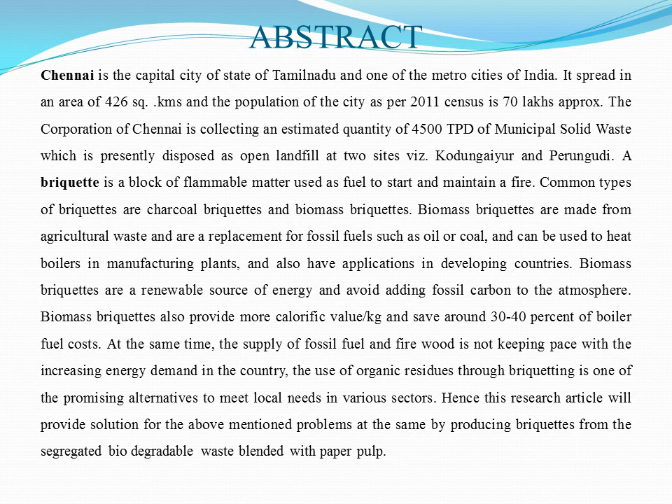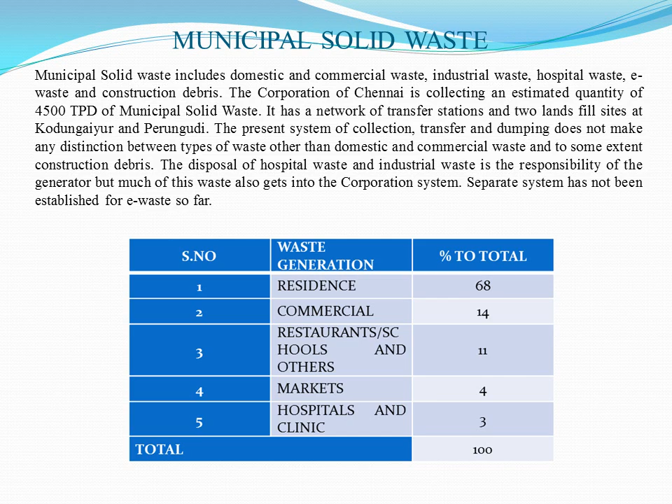Today municipal solid waste generated in our city comes from residents 68%, commercial 14%, restaurants 11%, markets 4%, hospitals and clinics 3%. Keeping this in mind, this large amount of waste generated in Chennai city was depleting our land. Landfill is a major problem today in our society, as there is no place.

As our Mayor said, we have to extend the Kodungaiyur and Perungudi area sites to fill the dump sites. So this was one of the major problems. So everyone is jumping to alternative sources for many fuels.

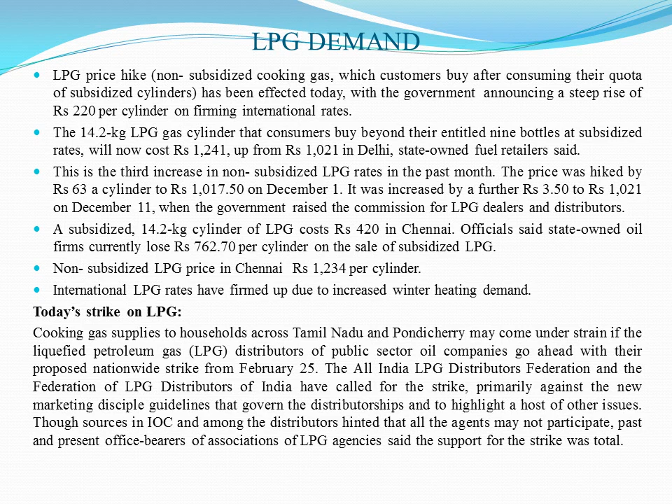So we found that we have to replace an alternative fuel for cooking gas, that is LPG. Today LPG is one of the major demands in our state due to its cost and other reasons. Keeping this in mind, we are replacing an alternative fuel for LPG.

Now the project is briquette. Briquette is not a new concept, it already exists. What is briquette? The briquette is a block of flammable matter. Just imagine it like cow dung that is used as fuel to maintain a fire to cook some food. That's it.

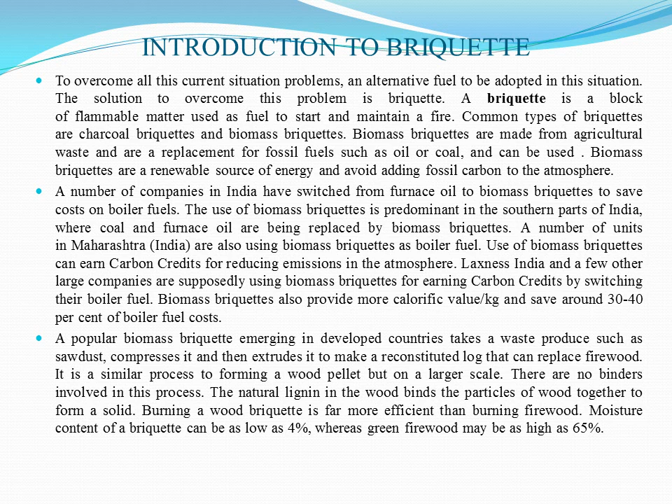Briquette is followed in many countries like Uganda. In India also, many companies have switched from furnace oil to biomass briquettes, using it as fuel instead of coal. In the southern parts of India also they are following the same. Familiarly, the briquette is going to take a place because it has a high calorific value, heating value, and less carbon emission.

We have done some literature survey papers, and everybody is taking municipal solid waste. Before that, this was a major challenging task for us because for the last 25 years everyone has tried to convert MSW, that is municipal solid waste, into something fuel that is useful to our society. Many authors have done different experiments, which we went through in the literature survey.

The first author took municipal solid waste like fruit, vegetable, glass, paper, plastic, metals, wood leaf, and other materials, with binders like cassava, starch, molasses, and clay, and made a briquette by crushing and mixing with binder, using a compression pressure of 250 kg per centimeter square. They found the briquette moisture content to be 9.84%.

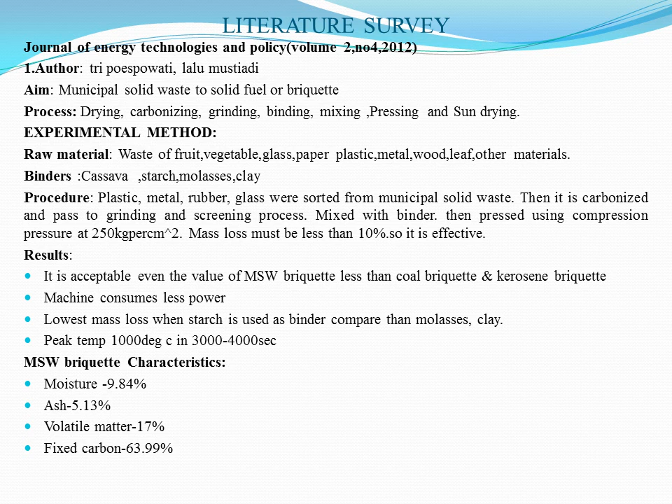Obviously it will burn for a long time, and they found the fixed carbon content to be 63.99% and heating value of 4954.62 kilocalorie per kilogram. The CO2 emission was found to be approximately 1.63% to 5.75%. The burning life was found to be 3 hours; one briquette will burn for 3 hours with that CO2 emission range.

This was very important - they took everything in the MSW, including plastics also, and found these results.

The second author compared the quality of briquette by machining - that is, mechanical press method versus hydraulic press method - to see how effective the briquette would be. Of course this doesn't deal with the briquette itself, but tells about the quality of briquette, indicating the most preferable method for manufacturing the briquette.

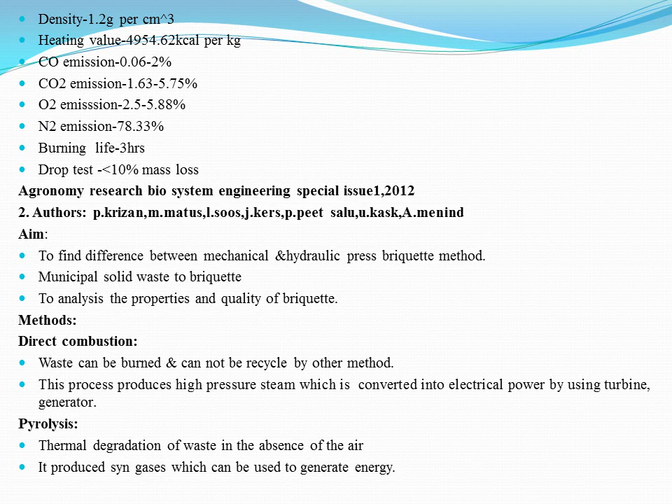They did direct combustion process and pyrolysis process, including removal of carbon, and considered parameters like moisture content, fraction size, pressing temperature, and compacting pressure.

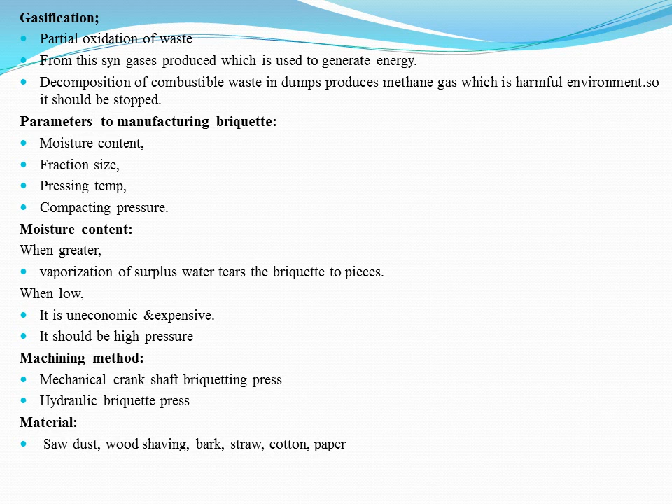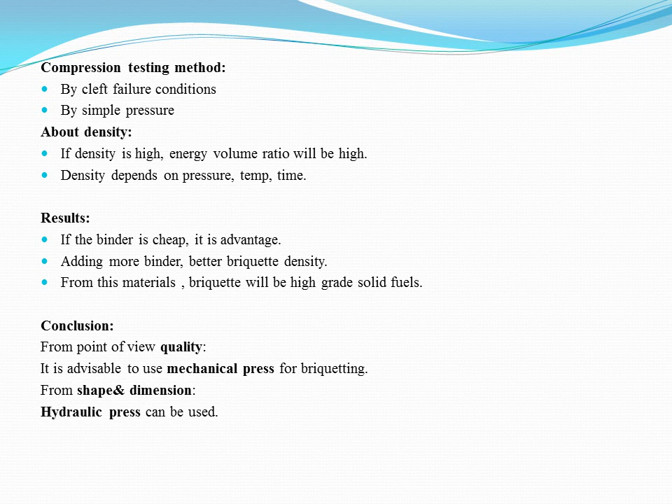They have taken the raw material as sawdust, bark, straw, cotton, and paper, using paper as a binder. By using mechanical press and hydraulic press methods, they found the briquette quality is much more efficient with the mechanical press method, while the hydraulic press is better for shape and dimension. This doesn't deal with briquette emission, but tells about the quality of briquette that will be more preferable by mechanical or hydraulic press.

The third author dealt with MSW, comparing cashewnut shell with grass and rice as briquette raw material. They made cashewnut shell briquettes and conducted tests like calorific value, shattering indices, tumbling, degree of densification, energy density ratio, resistance to water penetration, and water boiling test.

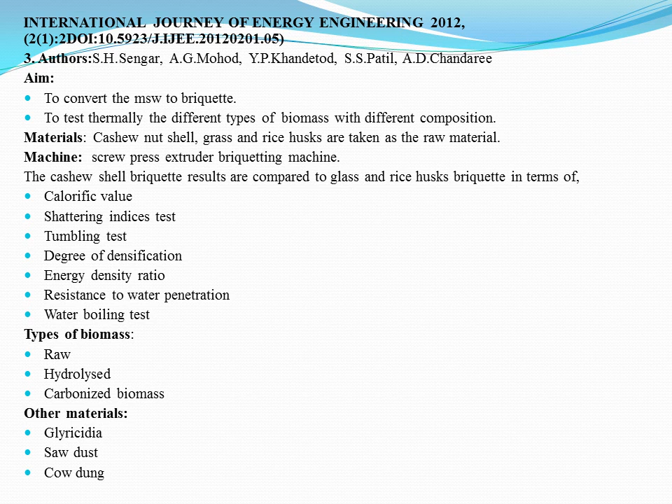Normally there are different types of biomass briquettes: raw, hydrolyzed, and carbonized biomass briquette. Other materials like glyricidia, sawdust, and cow dung can be added to increase the strength of the briquette.

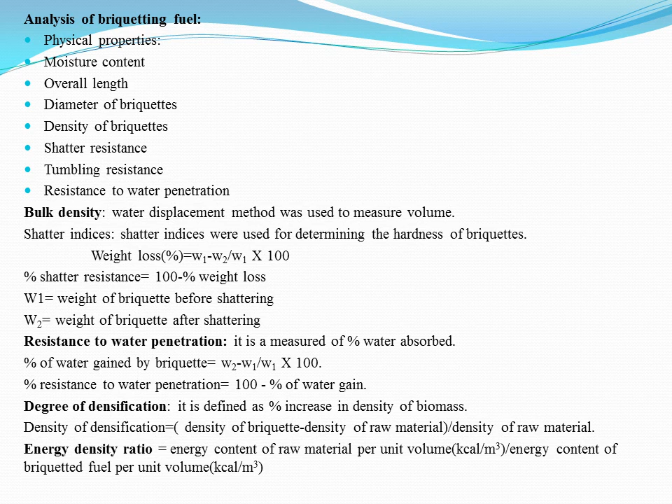These tests analyzed physical properties like moisture content, overall length, diameter of briquette, density of briquette, shatter resistance, tumbling resistance, and resistance to water penetration. They found the calorific value of this briquette is 5154.58 kilocalorie per kilogram.

Author 1 took raw materials like vegetable, paper, glass, etc., and calculated the calorific value as 4154. The third author took cashewnut shell as raw material, found the calorific value is 5154.58, and found the carbon content is 19.53.

The fixed carbon content is very much less, which is not sufficient to burn, whereas author one found the fixed carbon content is nearly 67%. So calorific value slightly increases, but it will not be sufficient enough to burn, and the burning life will be decreased.

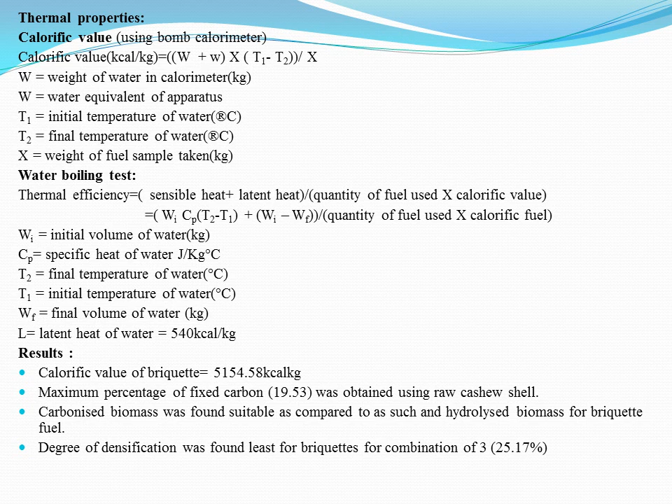Keeping this in mind, we went through such papers and noted that everyone is taking municipal solid waste as raw material without excluding plastics. Today we know we have to control pollution and find alternative fuel. The fuel must not affect our society and should be useful for it. So the main problem is to control emission.

Our objective is to segregate the biodegradable waste from MSW, aiming at reducing landfill, and to blend the biodegradable waste with paper to be converted into paper pulp. We are using MSW excluding plastics, keeping all other waste and taking waste paper as pulp.

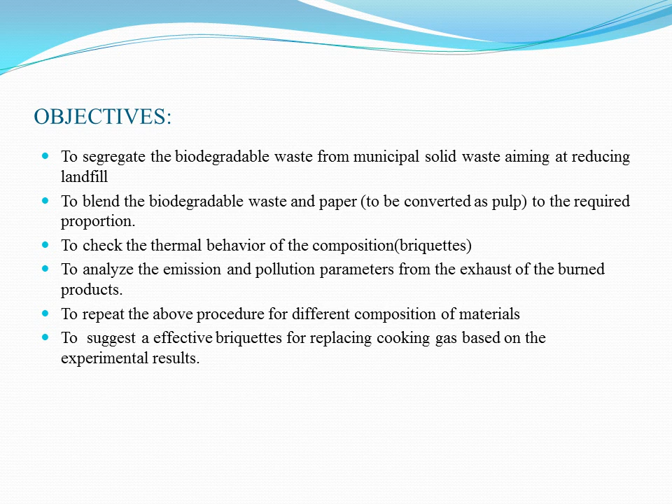We are making a binder from paper, and we have to check the thermal behavior composition test, analyze emission and pollution parameters, and conduct some experiments.

We take the crushed sample powder and mix it with paper binder, thoroughly mixing it. We take vegetable waste, food waste, and fruit waste, dry it in sunlight for 3 to 7 days, then crush it into powder form. This powder is mixed with paper pulp as a binder.

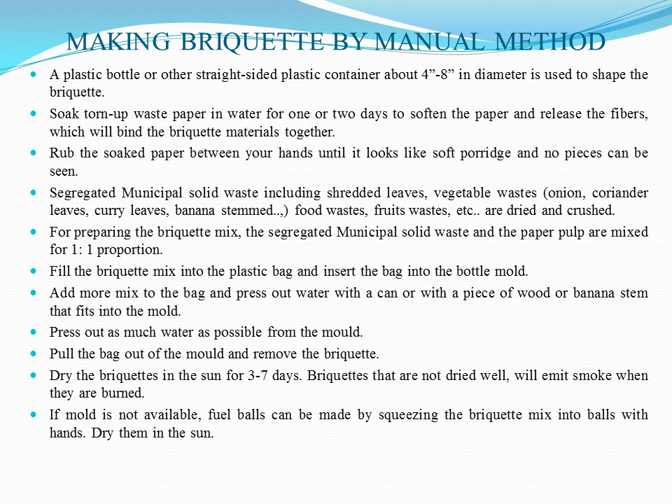Then we put it into the water bottle. We will show images of the steps we followed, including the raw materials used in the briquette. We take a water bottle and take the waste paper from the waste itself.

It's very important that the waste be soaked in a bucket of water for 1 to 2 days, and then the paper pulp is ready. Of course, it takes 1 to 2 days. Next we have to cut the bottle shape, maintaining a size of height 50 mm and diameter 40 mm, keeping that in mind for the papers we use.

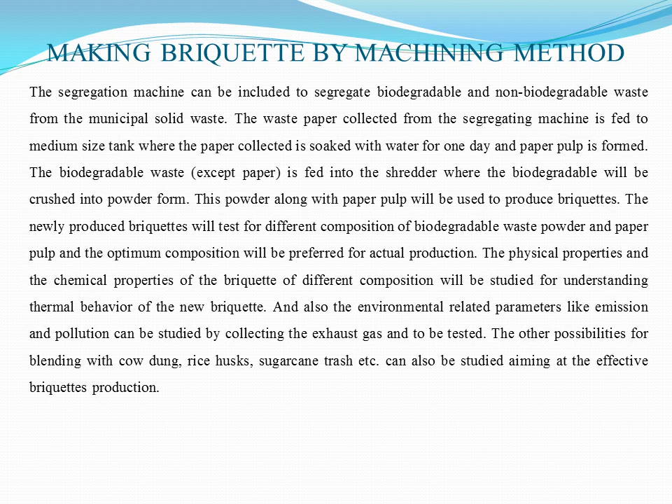So already I discussed in the paper, briquette by machining - which method will give a quality, effective quality briquette. Of course, screw extruder or hydraulic press, mechanical press. But our methodology in the machining method, we are introducing a small form, nothing but a shredder, which is a machining method. This is MSW waste.

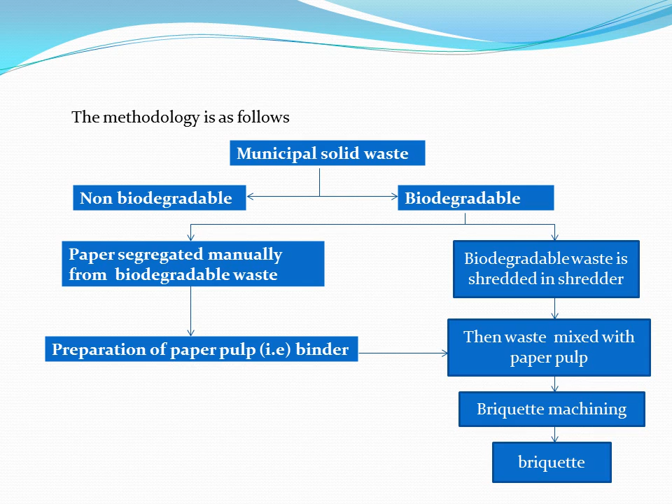We are separating into non-biodegradable and biodegradable. Paper has to be segregated from the biodegradable waste, and we put it in the shredder. It will be shredded, and this shredded powder is mixed with paper pulp, and by briquette machining we are forming a briquette, right?

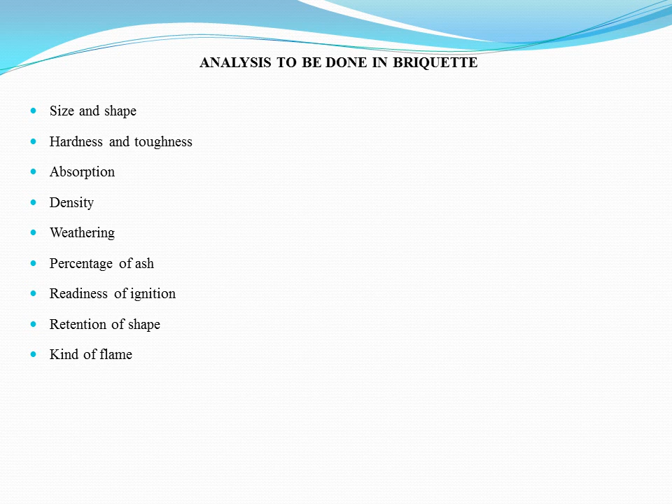Some analysis has to be done on our briquette - these are the analyses taken in our concept. We have to do thermal analysis, like finding the calorific value, specific heat capacity, thermal conductivity for a briquette, and do the emission test.

And of course we are in the basic, primary step of the project. We take a sample and we went to Anna University, and using EDXA analysis - done at Anna University - energy dispersive X-ray analysis.

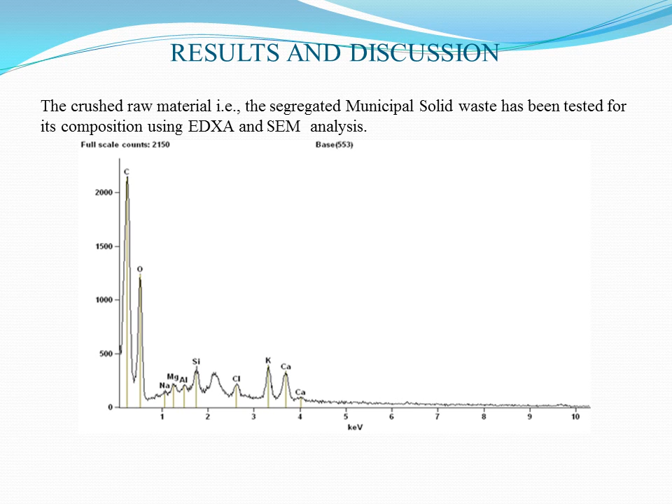Of course we find that we are taking MSW as a raw material except plastics. So we find that the fixed carbon content, compared to all other MSW waste which include plastics, is higher. We find that our sample has a fixed carbon content of nearly 67 percent, and oxygen 28 percent, which gives very good proof that this will burn effectively.

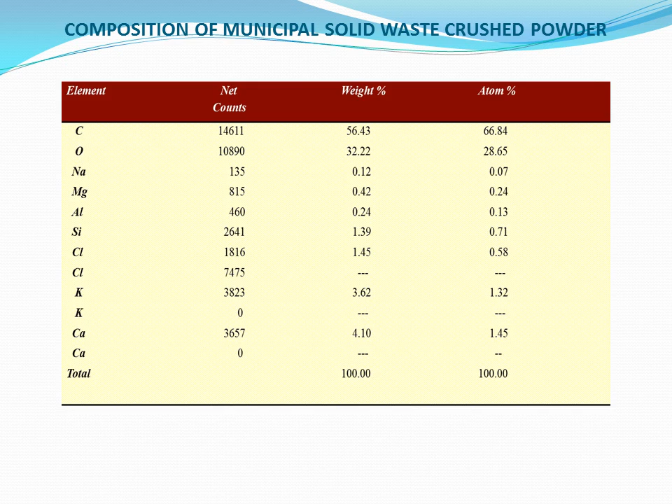But keeping that in mind, this large amount of waste generated in our Chennai city was depleting our land. Landfill is a major problem today in our society, as there is no place. As our Mayor Duraisamy said, we have to extend the Kodungaiyur and Perungudi area dump sites after the burning of briquettes.

And the conclusion is - as I already said, emission is a major problem today. So keeping that in mind, we have to reduce emission, and also at the same time fossil fuels are depleting. So to replace fossil fuel, we have to find an alternative fuel which will be effective for many years, for centuries to come.

So keeping that in mind, we are creating a process to avoid the landfill problem in society, and also turning our waste into an alternative fuel for cooking gas, as a best and effective alternative fuel in the form of briquette.

So our mission for this project is to execute it successfully, and to give society such a useful product, to make it a greener environment.

So the future works to be carried out on the briquette include the emission test, calorific value, specific heat capacity, and thermal conductivity. So far, at this basic stage, we are going in the correct way, which will give us a better result. We will provide an alternative fuel, the best and most effective alternative, replacing LPG gas. So thank you.